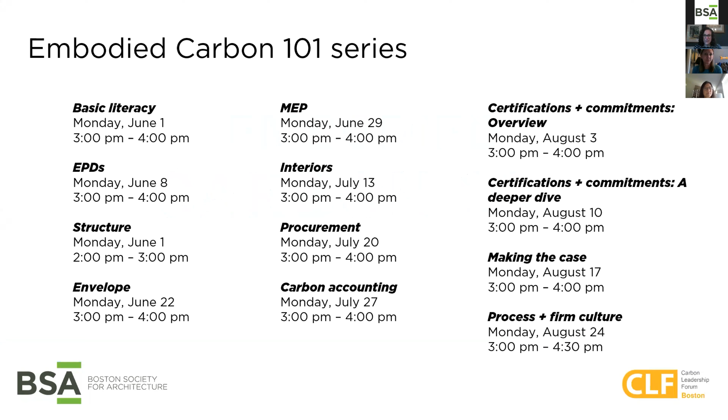I am Lori Ferriss, Director of Sustainability and Climate Action at Goody Clancy, a Boston architecture planning and preservation firm. I'm really excited to be here today kicking off the series and moderating our first session on basic literacy of embodied carbon. I'm really delighted to present this superstar panel of leaders in the embodied carbon world, beginning with Stephanie Carlisle, Principal at KieranTimberlake, an architecture planning and research firm in Philadelphia, Stacy Smedley, Director at SKANSKA USA in Seattle and currently Executive Director of Building Transparency, the nonprofit that launched EC3, and Frances Yang, Structures and Materials Sustainability Specialist at Arup, an international engineering firm.

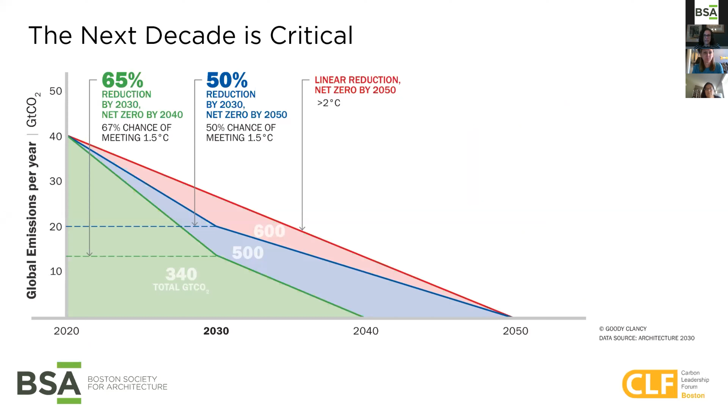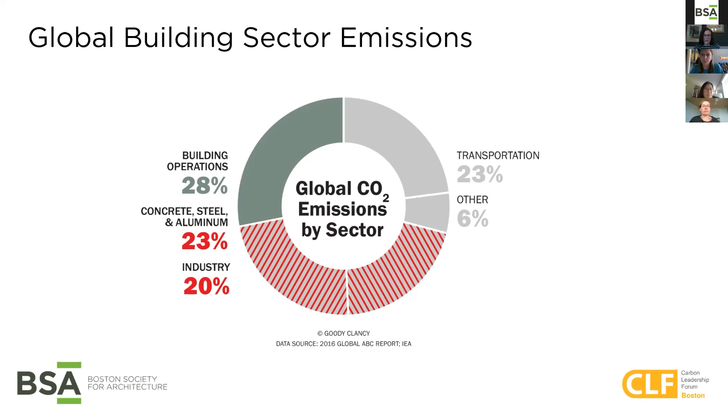So I think we as professionals in the design and construction industry need to take ownership of this pie and really think about how we can start to reduce our emissions. And as I said, the next 10 years are really critical.

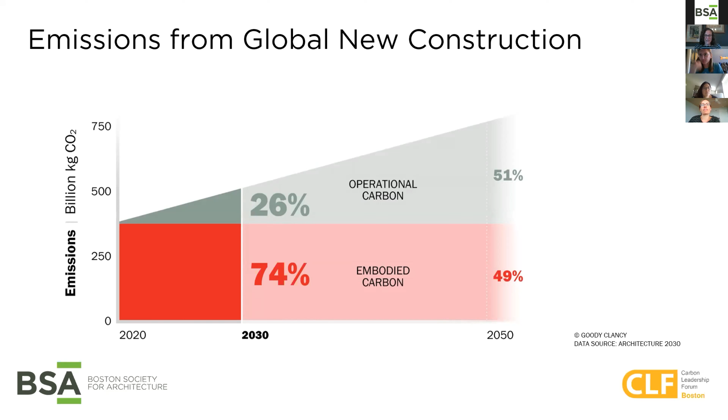When we look at new construction between now and the year 2030, embodied emissions will account for roughly 75%, two-thirds or three-quarters, of all emissions. And so it's really important that we address the full life cycle. We need to tackle embodied carbon emissions now if we want to have a chance of meeting those climate reduction goals.

We also know that we're building really rapidly. Between now and the year 2060, we're projected to double the square footage of our current building stock. And for context, that's approximately equal to adding a new New York City every month until the year 2060.

So I think this fact highlights, first off, that we need to better think about how we can reuse our existing buildings and think about opportunities to build less and increase our rate of renovation. And then we also need to rethink the way we build when we do need to add square footage.

Since this may be a little bit of a new concept to think about different types of emissions associated with buildings, I'm just going to quickly look at this graphically. Embodied emissions are the emissions associated with the building materials and construction. So at the beginning of a building's life, you have this spike in embodied emissions, from all the materials that are going into that building.

Embodied emissions stay relatively static over the building's use, with obviously some materials going into a building. And then every time you renovate a building, you have another little spike associated with all the materials and construction activities of the renovation. Operational carbon is, I think, what we're more used to talking about, which is there are emissions associated with using the building.

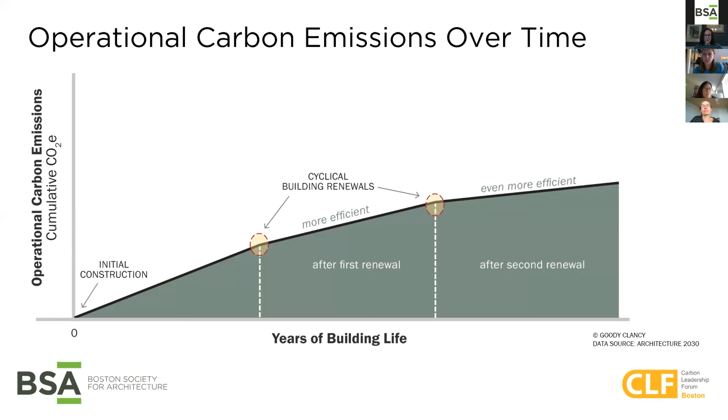So at year zero, there are no emissions. And then every year you use the building, you're emitting carbon associated with energy use in the building. And hopefully every time you renew the building or renovate it, that slope goes down as your building becomes more and more efficient. But what we really need to tackle are the life cycle emissions, the total emissions.

And these are what we need to get to net zero, and these are what we need to reduce over the next 10 years. And so we really need to be looking at and addressing both the operational emissions through efficiency and the embodied emissions, which is what we're here today to discuss.

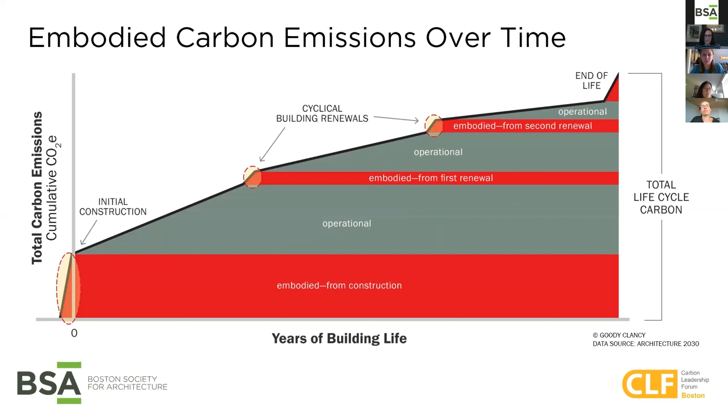So I just want to reiterate that we have a huge opportunity here to transform our best practices, the way we work with our supply chain, and the way we collaborate with each other to tackle embodied emissions. And I hope that today's session and the rest of the series will give you all vocabulary and tools that you need to make an impact now.

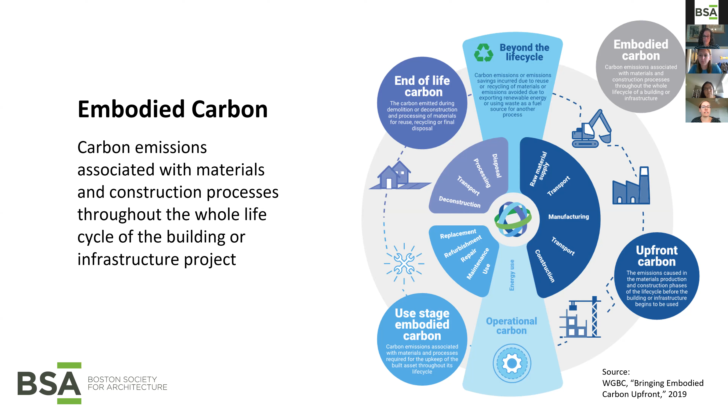So a really critical type of emissions for us to be looking at, particularly in connection to our 2030 goals and the aims to radically reduce climate change, which Lori was just speaking to. So I come back to this graph, which we've just seen one more time. It's a slightly different version.

It really hopefully pushes us to think a little bit more about these total emissions connected to a building project. So the building operations, which we really must radically reduce as quickly as possible and move towards net zero buildings. But these other slices of the pie, so to speak, that as architects we've sort of been ignoring or really underemphasizing for a long time.

And the reason I wanted to show this again is just to make the point that not just that our environmental burden or our guilt or our obligations have gotten larger and larger, but really encouraging architects to think about the fact that we touch many, many sectors. And we have a lot of power and agency outside of just the performance of a single building. So I hope that an emphasis on embodied carbon really helps us think broader about what architecture is and how we can help decarbonize the building sector, but also work on industry and all of these other sectors as well.

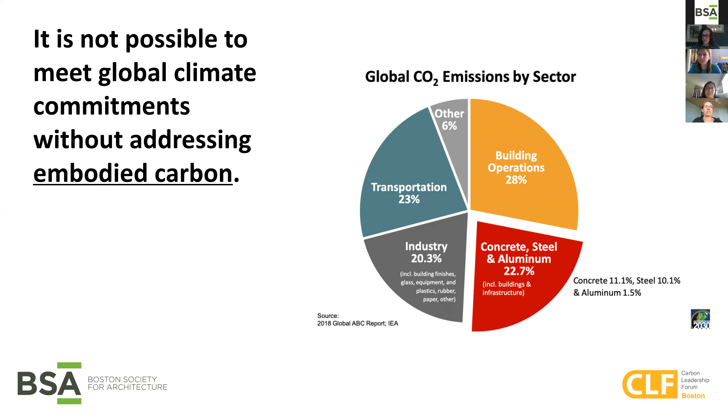So there's a fierce urgency for us to be talking about embodied carbon, a fierce urgency for us to be tackling it as soon as possible. And for that reason, we really need to be thinking about how we address embodied carbon, not just on the special projects, not on the one-off projects, not on our timber projects alone, but really how to spread this practice of life cycle assessment and thinking about carbon across our entire portfolios and our entire industry.

And so I really want to put out there this charge that we're all faced with right now of radically decarbonizing our entire industry, and the real amount of fierce collaboration that's going to require if we take that charge seriously. And so part of why it's so delightful to have architects, engineers, and contractors all on the same call together, all in the same presentations together, is that I think all of us feel this shared mission in which across the whole building industry, we all have a role to play. And we really need to think about how we can collaborate.

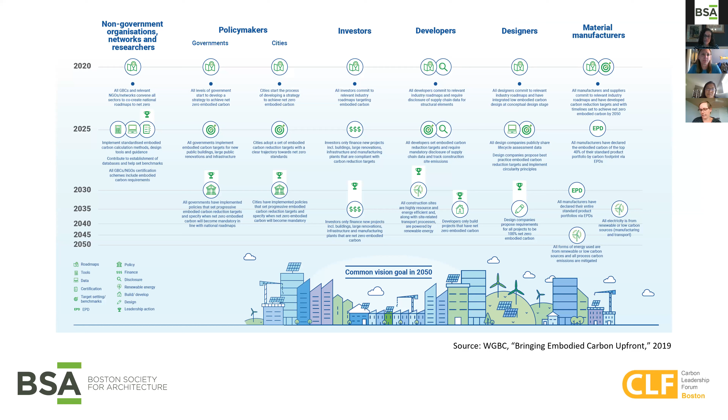So if we are aligned on this idea that we must tackle embodied carbon, how do we actually do that? The way that we actually assess and model is through a practice called life cycle assessment. Life cycle assessment is simply the evaluation of all the inputs and outputs and the potential environmental impacts of a product system through its entire life cycle.

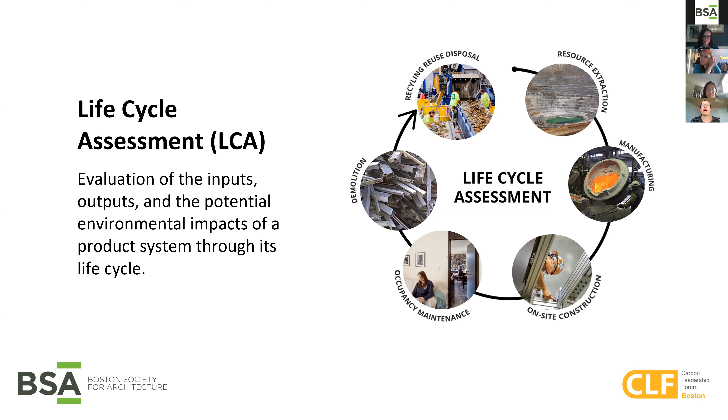This practice is new to the architecture profession and to our industry, but it's been around for almost 40 years, used from product design to manufacturing, etc., and is a really robust framework to help look at complex systems. So it's going to help us understand all those inputs and outputs, starting with resource extraction, land management, all the way through manufacturing, construction, use, demolition, or end of life.

Sometimes this is a helpful diagram to think about all those life cycle stages. And when we're running LCA models on projects, no matter what software we're using, those tools are really helping us think about all those material and energetic inputs going into those systems, and then all of the different emissions and outputs.

So whether we're running what's called a cradle-to-gate LCA, which is just going to look at that initial manufacturing or construction, or a full cradle-to-grave LCA, which is going to look at the entire product system, all the way to end of life, recycling, reclamation. These are all terms as architects we might not be totally in the weeds on with modeling, but we're all going to have to start getting a little bit more used to.

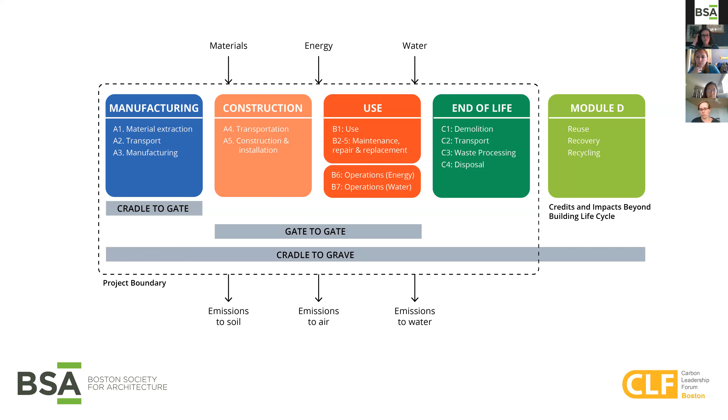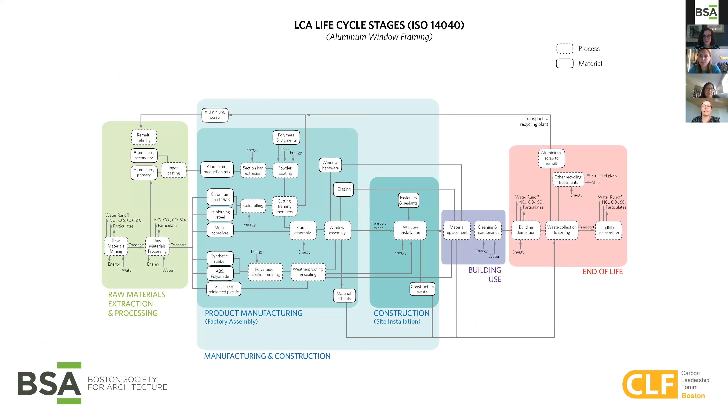And as we scale up and move from a single material to assemblies, one can imagine that that accounting becomes more and more complicated. Luckily, you're often not really going to be getting all the way into the details of all of these different assemblies, but making use of good LCA tools that help manage that complexity. Because once we really look at whole buildings, there's really two sides of this equation.

One is figuring out all the materials that are coming together. We often call that a bill of materials - this is one from a pretty small residential project - as well as all of the manufacturing and end of life side.

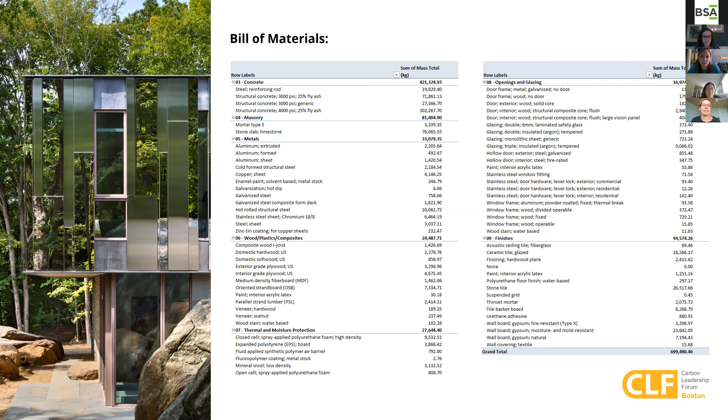What LCA models are really doing is taking all of that background data, the LCI or inventory data, and translating it into environmental impacts. Mostly on this call, we're talking about embodied carbon or global warming potential, but life cycle assessment also covers a whole range of other impact categories.

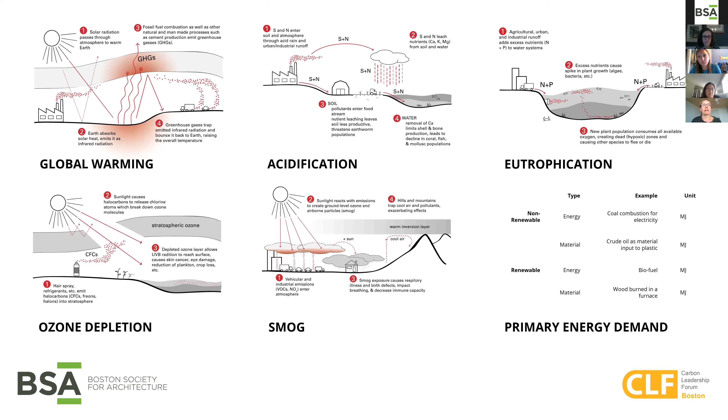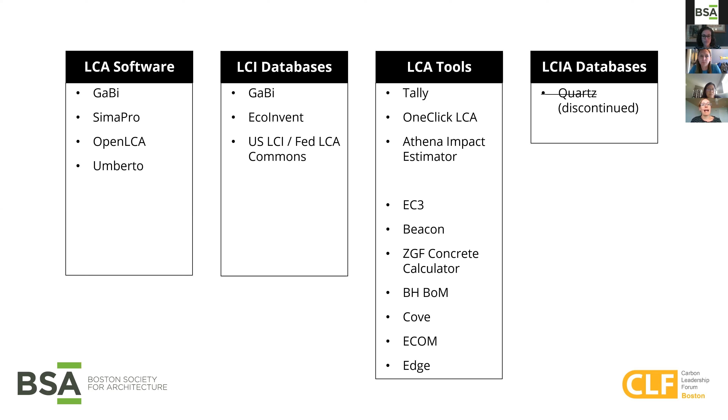I just want to mention, we won't go into this in detail, but there are a huge range of tools that can be used to do LCA. As a practitioner, you're probably mostly living in this third column - if you're running whole building analysis, you're probably using Tally, OneClick, or Athena. But there are also lots of other new tools and plugins coming online, from EC3, which helps you look at single materials and assemblies, through to Beacon, concrete calculators, and other tools helping to streamline this process. Those tools all draw on underlying software and databases that pull together the background data I was just showing about how materials are made and help us make comparisons.

What LCA is really asking us to do as designers and practitioners is hold in place two really different types of complexity. On one side, come to terms a lot more with how things are actually made and what the impacts are far beyond the building site. On the second side, what's really complicated is grappling with buildings as systems, where materials are coming in and flowing out - it's not really a single point in time. Modeling a building is actually a lot more complicated than a plastic cup or a cell phone or other simple products that have long been modeled in life cycle assessment.

So there are three main challenges that LCA really asks us to grapple with. The first is resolution. The tools help you translate between what we often do as architects, which is expressing design intent - thinking about a wall type, for example, how it's often graphically shown in construction documentation or in your BIM model - and translating that to the actual material quantities, which we need to run a proper LCA model.

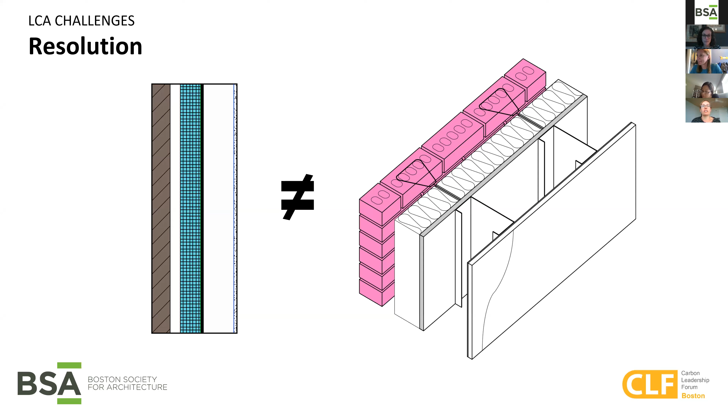The second thing it's doing, if you're running whole building LCA across all those stages, is thinking about time - how materials come in and out, and balancing trade-offs around topics like durability or maintenance. What's that initial push during construction, and then what are these other replacement and maintenance impacts, as well as end of life?

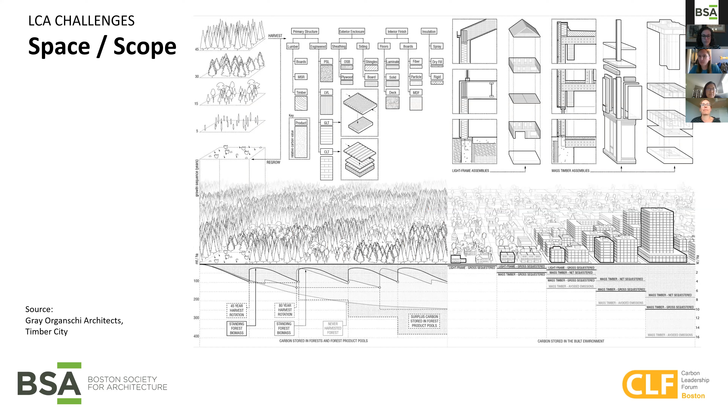So now I'll just go quickly through some of the basic types of LCA. I'm not going to go into detail on these case studies - I think the next segments in the carbon sequence, the next webinars, will get into detailed case studies - but I want to give everyone a sense, if this practice is new to you, of what this really looks like across an architectural project. I like to break it down in our practice into about 3 or 4 specific kinds of LCAs you might run across the course of a single project.

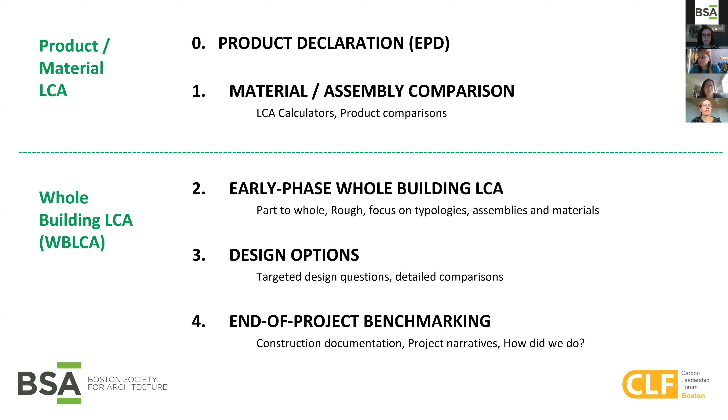The first are, you may be interacting with EPDs - environmental product declarations. Those are like mini LCAs that someone has already run, often about a single material. They're very helpful, and hopefully you can start getting more familiar with how these are published and what the data looks like.

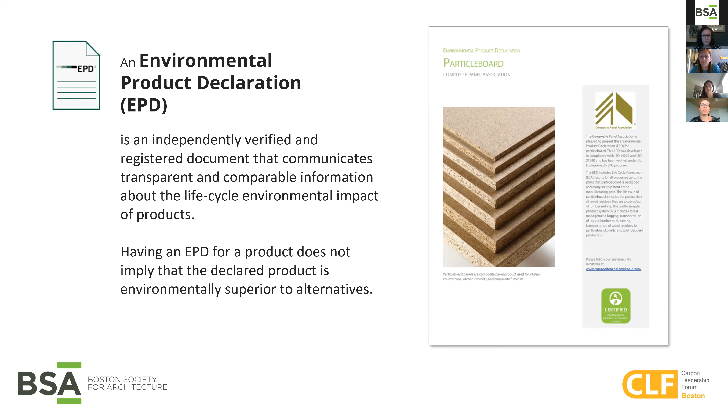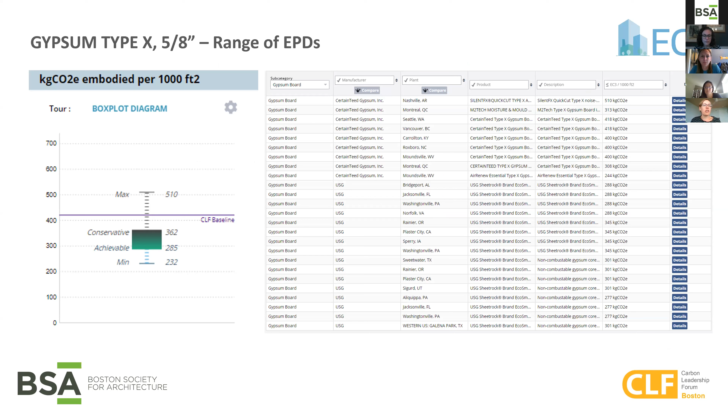Tools coming online like EC3, which I think Stacy's going to talk about in more depth, are helping designers find that data, get it together and compare it, and think about what an industry average number means and how to make improvements. So you can start working with that data, getting your feet into the water of LCA and thinking about simple product comparisons.

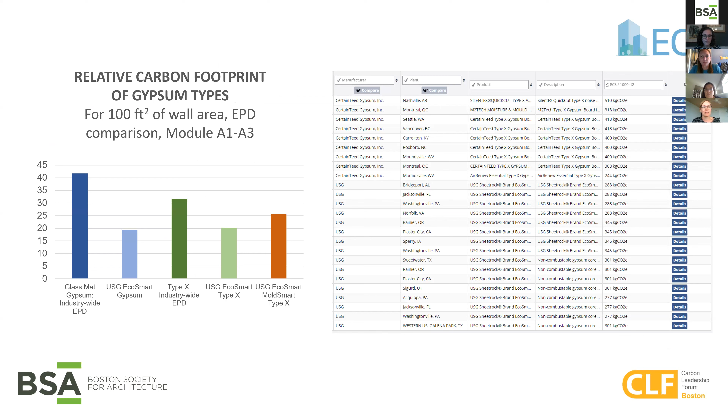Of course, when you're just looking at this last example, comparing different types of gypsum wallboard, comparing two products may seem really simple. But in many cases, the real challenge of LCA as a comparative practice is trying to figure out how to compare functionally similar things, and that's always a challenge for designers.

So in LCA we have this concept of the functional unit, which is about figuring out how to compare different assemblies, even different entire buildings. LCA gives a lot of guidance about how to set up functional equivalency, so we're really making comparisons that are meaningful to us.

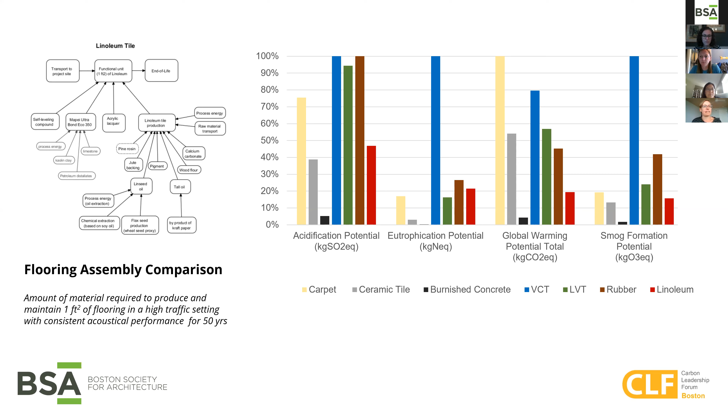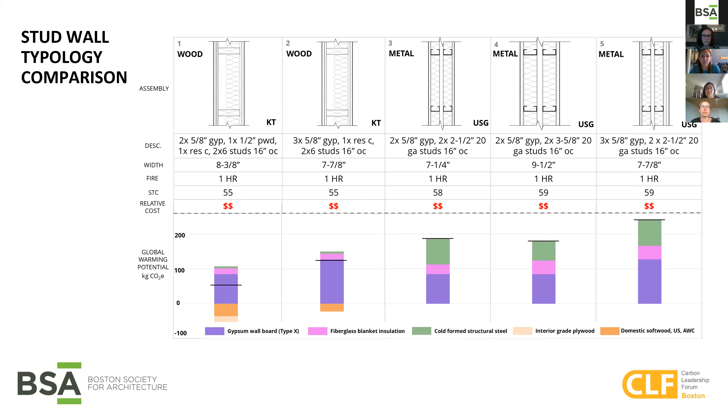Then when we move on to whole building LCA, I'll go through these pretty quickly, just giving a sense of what some of the tool output might look like if you haven't run an LCA before. We like to run these very early in a project, and really you're starting to get a sense of the part to whole—where do I spend my time, how do I focus my energy.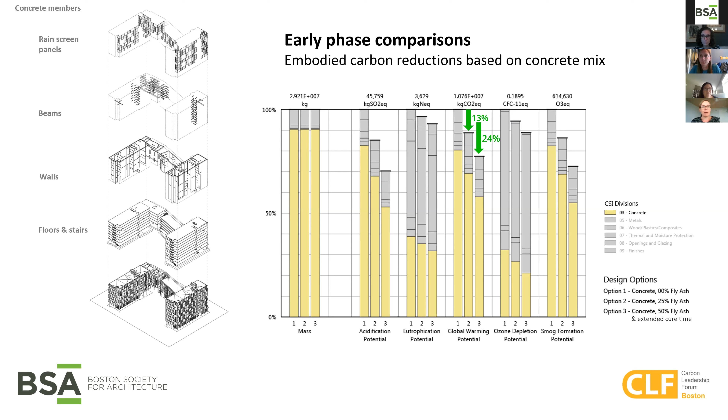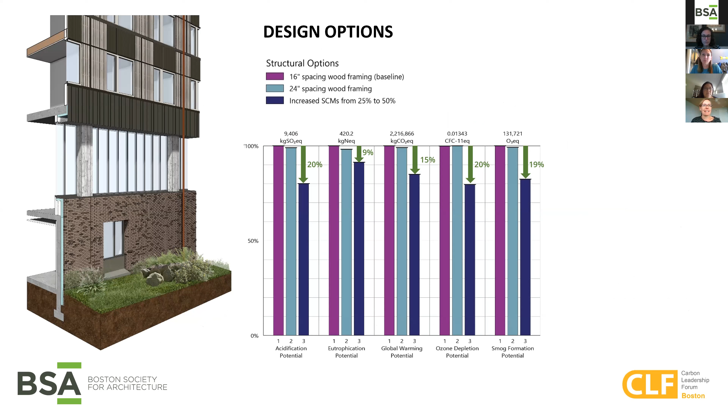Then often what we're doing is moving away from that whole building model and running design optioning. I find this to be super useful—it's where you can test out design decisions that could be made for a range of reasons, whether it's price, buildability, aesthetics, durability, etc. One of the real promises of LCA tools is that they can get this information on embodied carbon or environmental impact right in the hands of designers when making these other decisions, so it's not a separate analysis but really something we can use as part of the complex decision-making that designers are making on every project.

So this example is looking right at the ground floor of this building and testing out different assemblies natively within the Revit model, comparing a cast-in-place concrete option versus a brick layup system.

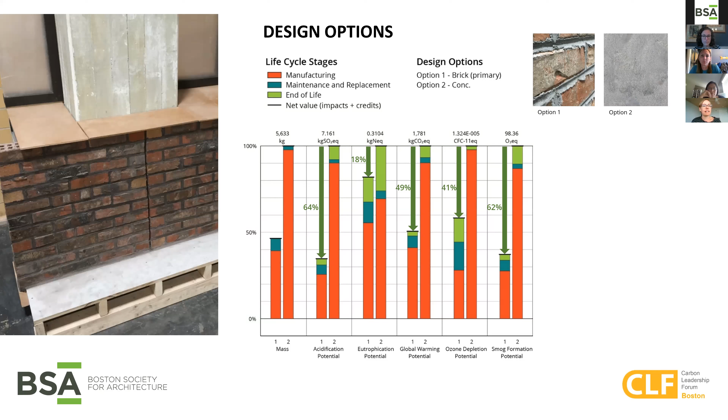So really, really helpful. In our office, we like to run these analyses at the same time that we're doing cost assessments, looking at energy performance, and often even making full-scale mock-ups. So really seeing embodied carbon as part of a holistic design strategy, not a separate exercise done on the side or after the fact.

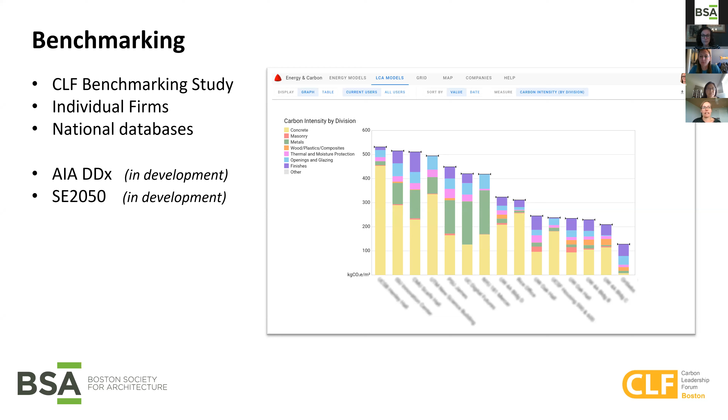And then finally, a lot of work is going on right now when we zoom out from the single project, just trying to understand what it even means to design a low carbon building. There's a lot of effort going into this question of benchmarking, as firms start to look across their whole portfolios, and as an industry, as we bring our data together through organizations like the Carbon Leadership Forum, the AIA's new DDX database, which is going to be incorporating embodied carbon, or other initiatives like the one from Structural Engineers 2050 initiative, both of which are in process right now and should really help firms understand how they're doing and help aggregate data across building assemblies and types.

I'm going to skip ahead and just end on these last two slides, making the point that really what we want to be doing is making as dramatic gains in embodied carbon as we possibly can across all of our projects. I think a lot of us that have jumped into the embodied carbon game are really still in the space of developing tools, developing vocabulary, finding out what the big win is. And I think we need to be doing that.

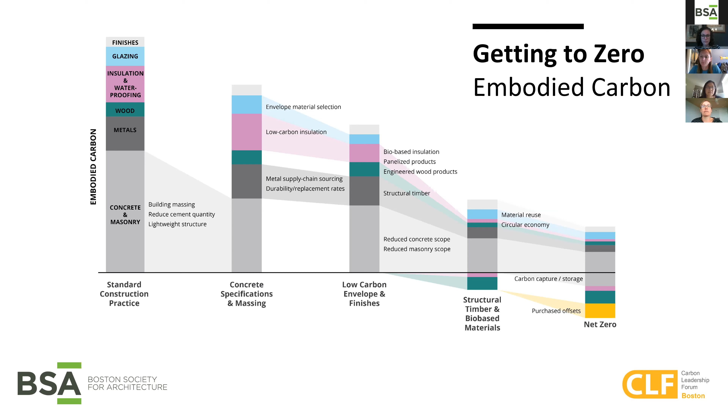So I just want to leave with these last proposals for all of you, something that maybe you can incorporate into a project you're working on now or any project. I think it's really important that teams start to set targets on their projects - we're not going to make any progress unless we actually have goals, not just to do LCAs, but hopefully setting some internal performance goals themselves.

Don't stop with the model. It's not meaningful if we only make carbon gains in our Revit models. We have to actually get it into construction - Stacy's going to speak to this. It's hugely important that we go across the product chain and really work with all of our partners to make sure these strategies are actually built and don't get cut from the project.

We need to think about how we talk to clients, but also maybe we just need to do this work, right? And I think that's a huge topic that will come up in other sessions in this series. Bring together carbon figures and analysis with design questions. I think that's really been key to success across lots and lots of practices - getting embodied carbon conversations right into design reviews, making it feel relevant to everyone on the team.

I would really encourage folks to not isolate embodied carbon and energy performance, but start thinking about a total carbon picture. It's the only way we're going to find strategies that are meaningful on all of our projects, because the trade-offs are there, right? So I think that's a really important topic. And finally, we all need to advocate for this topic, but we also need to share data - share strategies that are working and really all help each other across firms and practices.

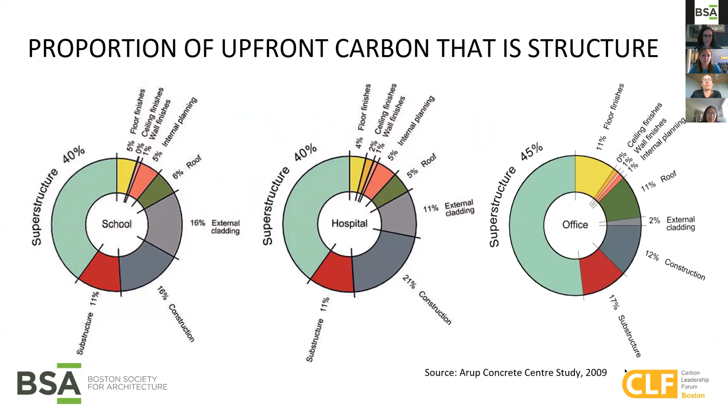Well, lifecycle assessments can actually help us answer this question. And here are some of the top 5 strategies that I think LCAs have taught us over the years. At the same time, I hope to use these examples to illustrate more about a lot of the LCA fundamentals and build upon what Stephanie's already introduced - to really help you understand some LCA principles that are important to keep in mind when doing LCAs.

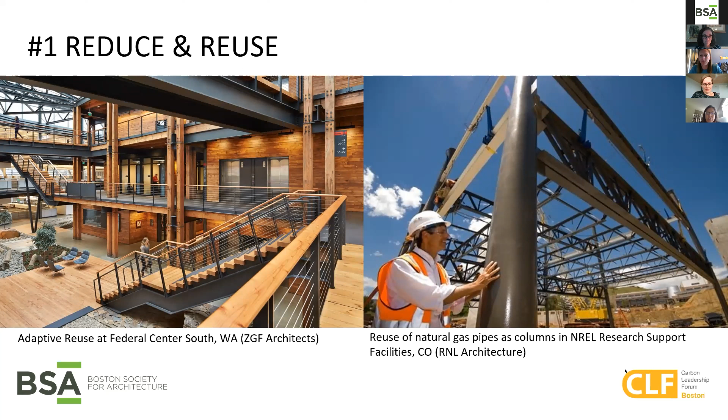Right, so the number one strategy, as you've heard already, is reduce and reuse. This includes reuse of existing buildings. It's also reducing the size of what we need to build new. And then when we can't do that, at least trying to salvage or use salvage building components.

The reason for this is because the manufacturing of materials like cement and steel are so energy intensive. There's also carbon dioxide released in the chemical reaction that occurs in making cement and also in virgin steel. So the production phase of the life cycle impacts is usually what dominates these materials. Once you see this, it's obvious why the more we can avoid those manufacturing processes, the more we can cut out the carbon emissions that occur in using these materials.

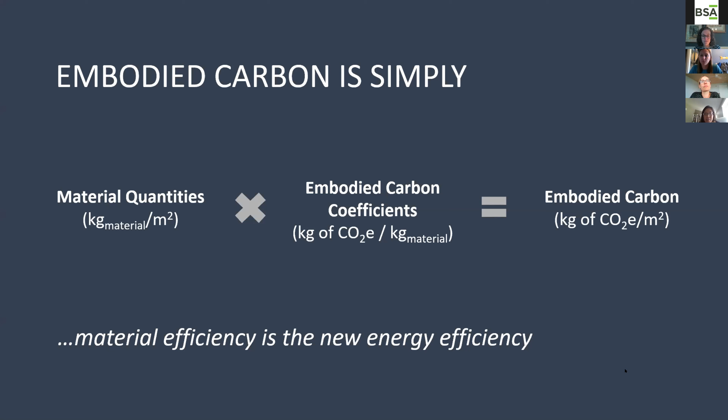The second strategy of material efficiency comes from the simple equation that Stephanie also introduced. Embodied carbon is basically material quantities times embodied carbon coefficients. So while we talk a lot about what contributes to the embodied carbon coefficients over the life cycle of the materials, equally part of this equation is the material quantities. I like to think that material quantities are to embodied carbon the way energy use intensity has been to operational carbon. So in essence, material efficiency is the new energy efficiency.

What's great about this strategy is that structural engineers already strive for material efficiency all the time. It's just part of their job. Computational optimization has helped us get better and better at it as well. So on the new international airport in Mexico City, these kinds of advancements helped us reduce the weight of the roof down further than in any of our past airport projects.

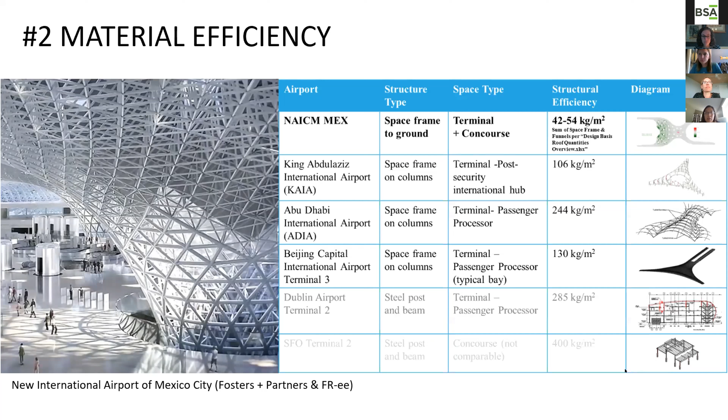But equally critical was what you don't see: a close collaboration with Fosters and FR-ee, and an approach to design that allowed the geometry of the structure to follow the optimization. We don't need fancy algorithms necessarily to make structures more efficient. There are actually a lot of other systems and ideas that I think are just underutilized. We don't use them enough, really, often because of cost, unfamiliarity, or other challenges at the moment. But I think we're going to need to turn to those techniques more and quickly if we're going to have any hope of driving down embodied carbon as soon as we need to.

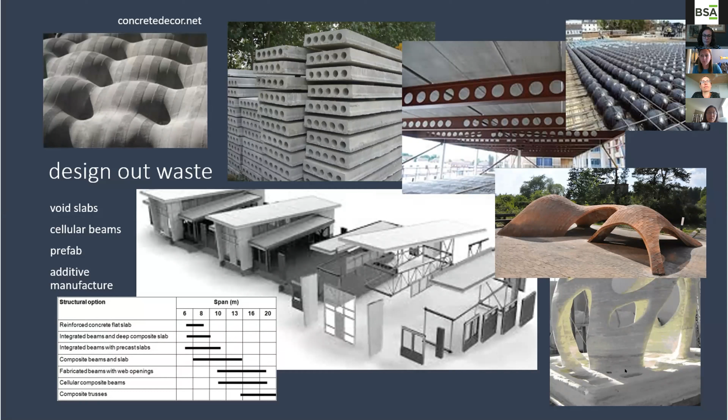So the third strategy would be reducing cement. You've seen again where Stephanie showed that example where the impacts from concrete were really enormous. This occurs in steel structures, timber structures, and it's because in steel systems we still use concrete in the floors. And for all structures, you're nearly always using concrete in the foundation. So just as we don't normally need as much material as we put in our structures, we don't need as much cement as we're commonly putting in concrete.

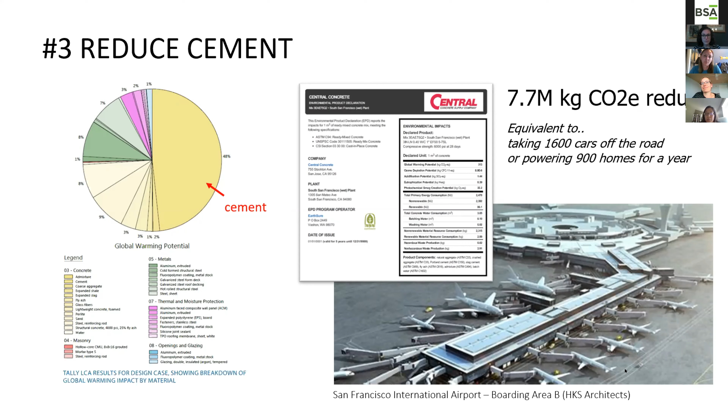On the SFO airport, we were able to use environmental product declarations, as you see from Central here. These are EPDs, and we could carefully tailor the concrete mixes and limit the GWP based on looking at a lot of EPDs, and really just talking with suppliers early, talking with contractors early, and end up with significant reductions in the embodied carbon.

Now this also brings up another tenet of life cycle assessment called sensitivity analysis. We want to keep in mind that there can be significant variability that isn't always illustrated by the LCA tools that use a single embodied carbon factor, when there can actually be a range for that material.

So for instance, here we were comparing a variety of concrete and structural floor systems. While you might see a particular system that appears to have the highest embodied carbon overall, if we specify the concrete to be very low impact, it could end up lower than if we chose a system that appeared to be lowest but we didn't pay any attention to the specification of concrete, which could end up being higher than the one that initially appeared highest. I hope that makes sense.

So in any case, being aware of the sensitivity of the results to other factors and then testing them can help us see more clearly which of our design decisions are most critical.

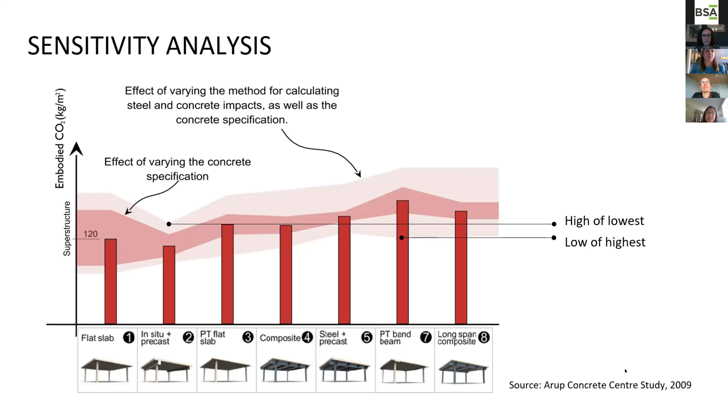Okay, number 4, I alluded to timber, but it's really about using carbon storing materials instead of highly carbon emitting materials. In this case, it would be using a timber structure instead of a concrete structure.

Now making comparisons with wood gets complicated really fast. So there are 3 more LCA fundamentals I'd like to remind us about.

The first is that we should make sure to understand which life cycle phases are included. You might wonder why sometimes with wood you see positive carbon factors and sometimes negative. It's often because there are different methods for deriving those carbon factors, and they don't start and stop at the same place over the life cycle. Here you see 7 different methodologies that are not aligned, so in the end they land on different carbon factors for wood.

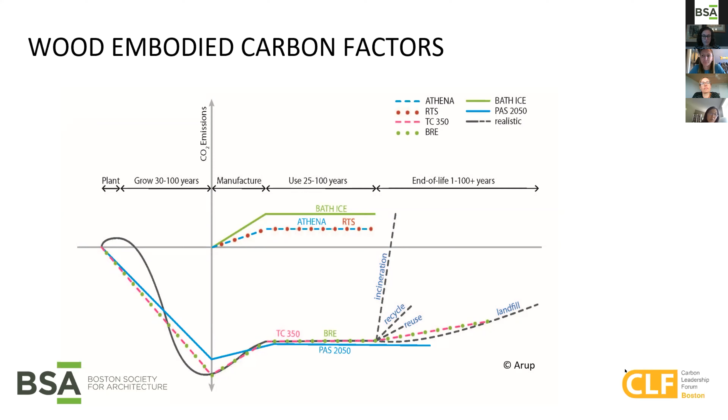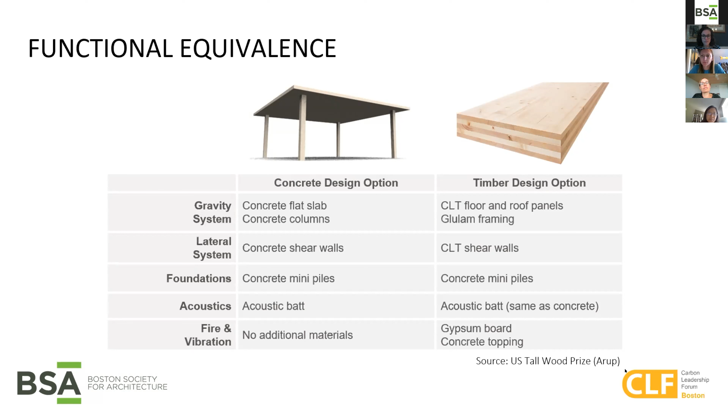The second important fundamental is functional equivalence, and Stephanie mentioned this as well. Here's an example where it's really important to keep in mind that we have to do apples to apples comparisons. Sometimes we see studies that only show the structural portion of a timber system compared to concrete, but that leaves out all of the materials often needed to make the wood system provide all the function that a concrete system would offer inherently. So for a fair comparison, we need to ensure functional equivalence by adding in the materials that provide especially the same fire and vibration performance as the concrete system. It's important to include those extra materials in the comparison.

Lastly with wood, it's really important to remember that with an LCA, we're looking at a limited system boundary, either with EPDs that are usually cradle to gate, or even with LCA tools that expand that a little more. There aren't currently LCA tools that account for how our procurement choices could influence what happens in the forest. And the carbon in the forest is magnitudes larger than what's sequestered or stored or coming out of the processes in making wood products.

So we have to realize that we might need to turn to other tools too. Forest certifications and carbon offset programs are some examples that are needed to fully inform our decisions around wood, because LCAs don't always tell us everything, even around carbon.

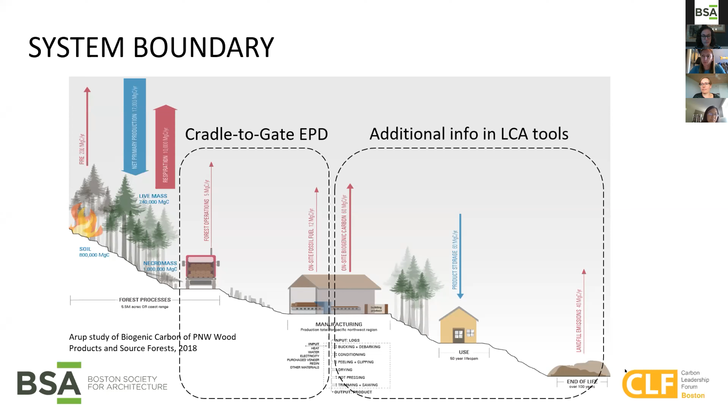And then the last of the 5 is design for deconstruction. So thinking ahead about how we could change this term cradle to grave that's used in LCA, how could we change that to cradle to cradle? How could we build now so that in the future we can use those materials for new buildings? It's basically going back to strategy number 1 of using reuse or salvage.

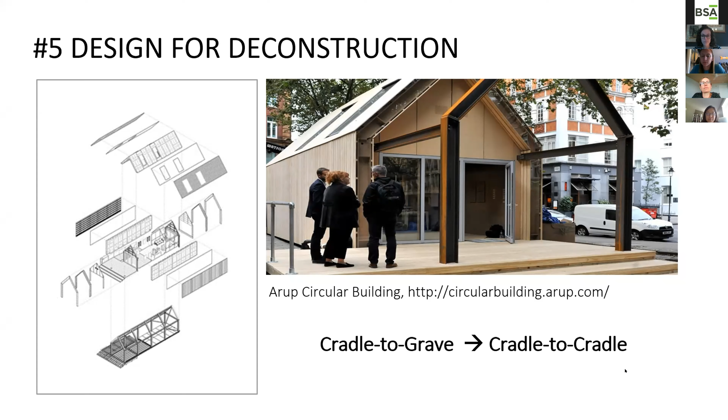Okay, so now I want to talk a little bit about baselines versus benchmarks. These are commonly used to quantify how are we doing. Are we doing better, and by how much?

Now with baselines, and I think this will be covered a bit in the certifications and rating systems course later, but they're usually in those programs because we need to demonstrate some kind of savings when comparing your building to some kind of baseline. But the baseline is often a fictitious design that is a better representation of business as usual, or what would result if there were no interventions. There are a few standards and guides out there to help us define this baseline, but in truth, we don't quite have the equivalent of an ASHRAE 90.1 Appendix G that we have for operational energy baselines. That's something we're going to need to work on as an industry, towards a better standard for defining the baseline for these comparisons.

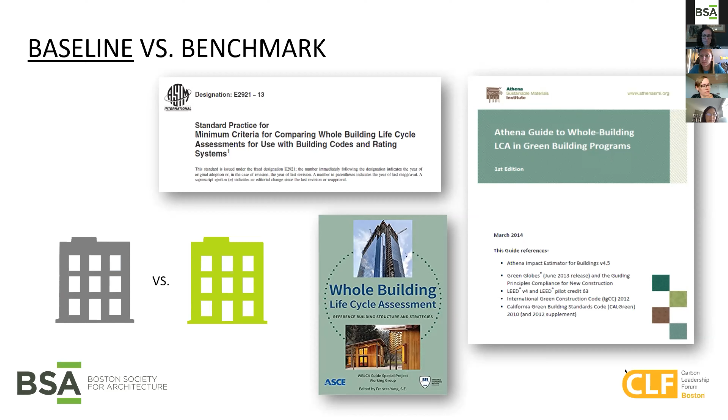Now benchmarks, I think of as a little different. This is where we're looking to see how our design compares to other real projects that are similar, and they're often used for setting targets.

And for policy even. Now the Carbon Leadership Forum did a benchmarking study in 2015, and it's probably one of the best sources for benchmarks right now. But if you look more closely at the data, you'll see that there are actually a lot of big gaps in the information that was available. And if you look even closer, there was a lot of inconsistency in what building components were included and the source of the embodied carbon factors used from different data sets.

So basically, we need more data from projects, and collected in a way that's more consistent, giving us the granularity we need to set better benchmarks and targets, especially on our way to getting to zero. And what's exciting to me is that this is one of the undertakings under SE 2050.

Last September, the Carbon Leadership Forum issued a challenge called the SE 2050 Challenge, and we're now working on a commitment program modeled a lot after AIA 2030. One of the primary aims is to engage structural engineers to report embodied carbon of their designs to a common database, so we can establish benchmarks and targets more quickly and get everyone on the same path to zero. It's meant to be a resource to inspire and equip structural engineers. If you know structural engineers, or you are one, check out our website at se2050.org and join us.

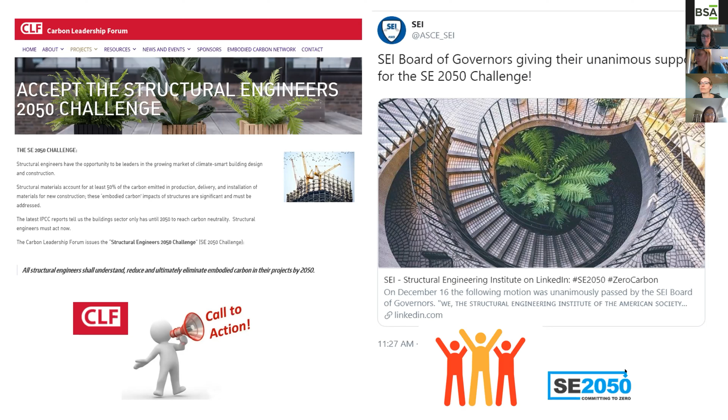Even if you're not a structural engineer, I hope you'll keep these five strategies in mind and remember these LCA fundamentals, because I think they're really important to get the most out of LCA and do the most in reducing embodied carbon. So now I'll turn it over to Stacy, who will talk about embodied carbon in construction.

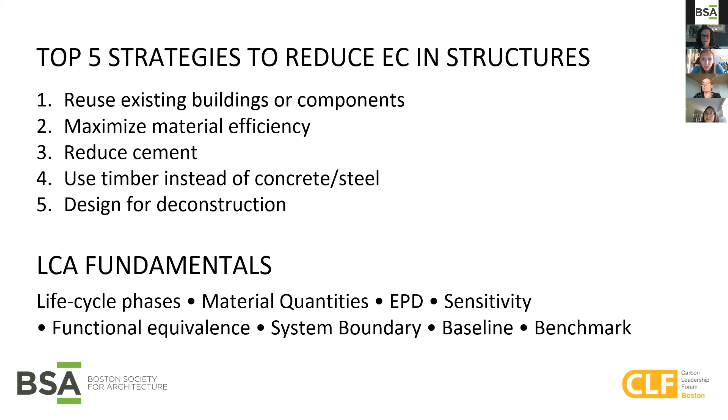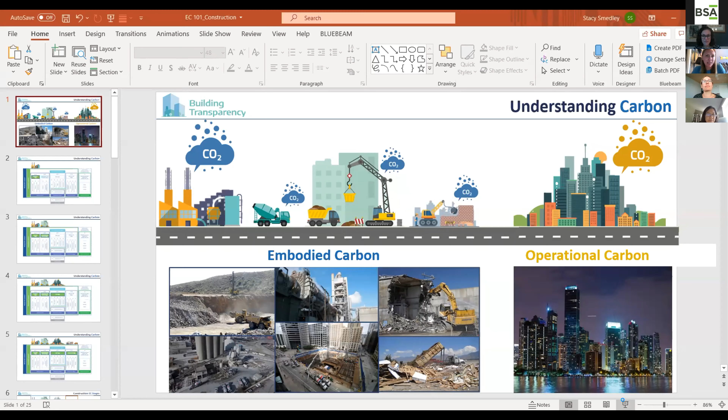My name's Stacy. I'm a sustainability director at Skanska USA, a large global contractor. I'm also the current executive director of Building Transparency, a new nonprofit focused on providing tools such as EC3 that are open access, to help actively reduce embodied carbon today.

What I'm here to talk about today is how contractors in the construction industry can look at embodied carbon, and why we think we have a role in addressing this as an industry.

This is a slide I typically use when talking to contractors, showing operational versus embodied carbon. Operational carbon is what happens once we've turned over buildings to their owners, and the lights turn on, systems start to work, and energy starts to get consumed. Embodied carbon is everything before that - all the things contractors are actively engaged with, whether it's how we extract and procure materials, how we transfer them to construction sites, and how we install them. It's a tangible thing from a contractor perspective, because it's the stuff we work with - the building materials.

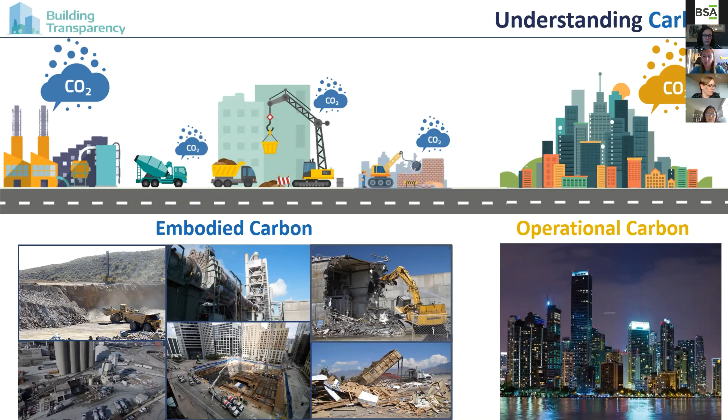I believe contractors have a very large role to play in this, and we need to approach it as an industry in terms of how we address this.

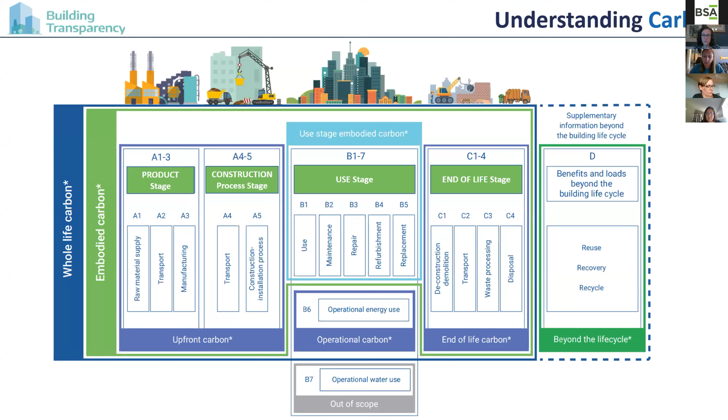Looking at it from a construction perspective, it's really stage A and stage C where we as contractors have the most impact. Within those stages, these are just some pluses or minuses, because this can change based on what reports, but based on data we've developed at Skanska on our projects, you can see that stage A is a large portion of the overall embodied carbon footprint.

And then the end of life stage also has a component to play. Within stage A, you're looking at the product stage, which is really that manufacturing stage versus the construction process stage. The manufacturing stage is where the most emissions kind of play out. So if we're going to start somewhere, really looking at how we are procuring products and where from, and are they the lowest carbon options, is how we've approached this so far.

One thing we also tend to think about from a SKANSKA perspective, but just for construction in general, is really moving that end of life stage up front. When we are building a building, typically we are demolishing a building first, or clearing a site. So we really need to think about how we are taking those materials down, how we are recycling them into new products when possible, how we are not just looking at waste diversion from a percentage reduction, but also from a carbon perspective. Thinking about that on the project you're deconstructing now, in addition to the project that might be deconstructed in 50 years.

So at the end of life stage to start, there are some typical things that are good lessons learned and really kind of rails to guide you. Setting project goals around construction waste during pre-construction, quantifying those opportunities for deconstruction before putting together your bid documents, working with companies that would come in and actually tell you what it would take to take out the gypsum board or deconstruct the structure of a building.

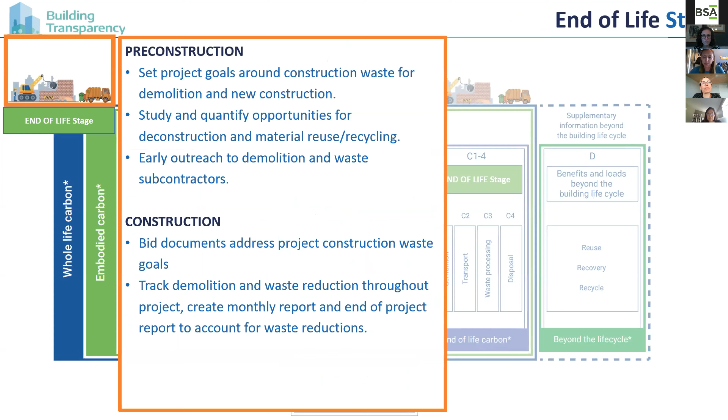And then getting into construction, it's really looking at the bid documents to make sure you're addressing project waste. We're also tracking it actionably and looking at not just percentage reductions, but the carbon emissions associated. Here's an example of a report SKANSKA puts together for waste, where it's not just looking at tons reduced, but also gallons of water consumed for things like demolition, or carbon emissions. So again, building carbon into how we actually track and report these things, even at the end of life stage when we're demolishing buildings.

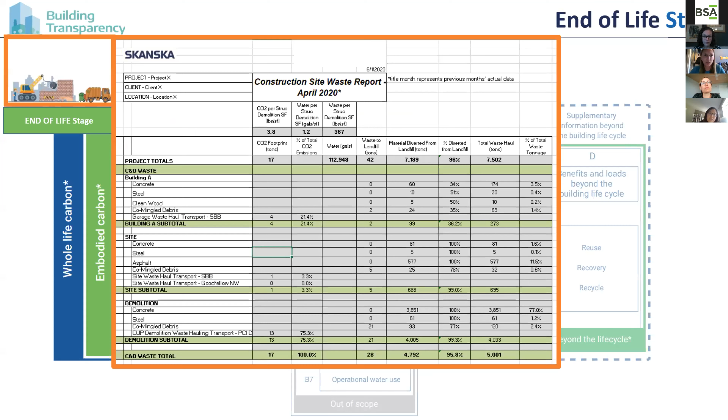The next is really that key stage in our minds, that A1 to A3 stage, where we're looking at the large crux of embodied carbon of what we're procuring and putting into place.

Again, there are lessons learned about making sure we're looking at carbon and cost in pre-construction, that we're looking at project specs from our design teams, seeing if it's addressing environmental product declarations and goals, and then actually starting to engage our suppliers during pre-construction. If we know carbon is something we're going to track on a project, if we're building that into our procurement documents, getting ahead of that with suppliers, letting them know it's coming, that they should invest in EPDs, then they should also know it's going to be part of the bidding criteria.

During construction, again, it's building it into the bid documents, so we're addressing embodied carbon and EPD requirements in bid language. We're putting it into our leveling sheets, so we're looking at EPD generation and carbon quantities next to cost when we're looking at our bids. And then tracking the materials we procure and actually assuring that we are achieving the savings we've set for ourselves during whole building LCA and our specifications during design.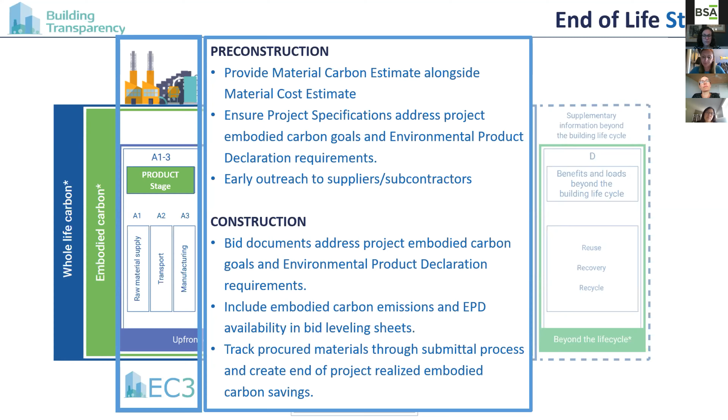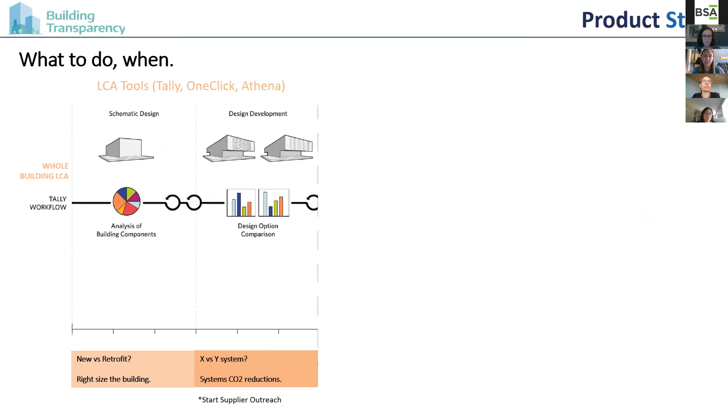So when we started looking at this for the construction industry, looking at the LCA tools out there that were doing a lot of that early work about right-sizing your building and looking at systems versus each other just to reduce embodied carbon, what we couldn't find was that next stage where, as a contractor, we would want to have language and specs that said, okay, you're using carpet, let's make sure we are specifying a carpet that has an EPD and also has a certain kilogram of CO2 value as a basis of design. So then we can actually bid on those documents and actually procure and track the data.

And really both of these things need to happen, this early LCA assessment plus this specification and procurement assessment, to really reduce embodied carbon and have it be realized.

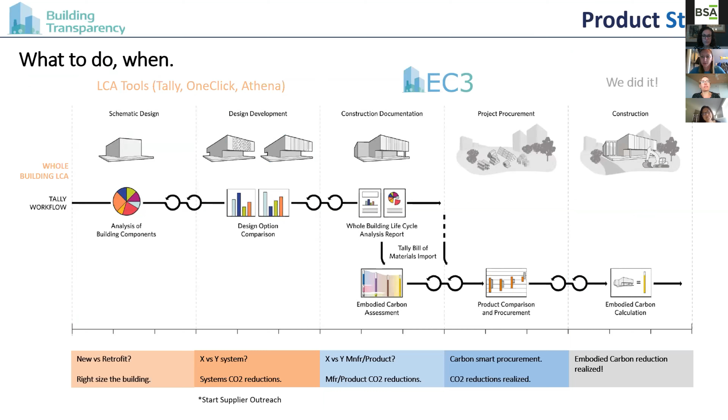EC3 has been the tool that's been developed, starting at incubation at the Carbon Leadership Forum and now housed at buildingtransparency.org. That's a free open source tool trying to be a resource for the industry when it comes to accessing EPDs, understanding who has them and who doesn't, and starting to set baselines, benchmarks, and reductions depending on how you search and sort the data. I encourage everyone to go register and log in and get your free access. There's no cost to join to be able to do the next things I'm going to show you.

You saw a version of this with Francis's presentation too, but really this embodied carbon accounting is similar to cost estimating. So we call what we do on the construction side an embodied carbon estimate, where we take kilograms of CO2 as our units multiplied by material quantities that contractors generally have for estimates, and get to an embodied carbon estimate for the project alongside a cost estimate.

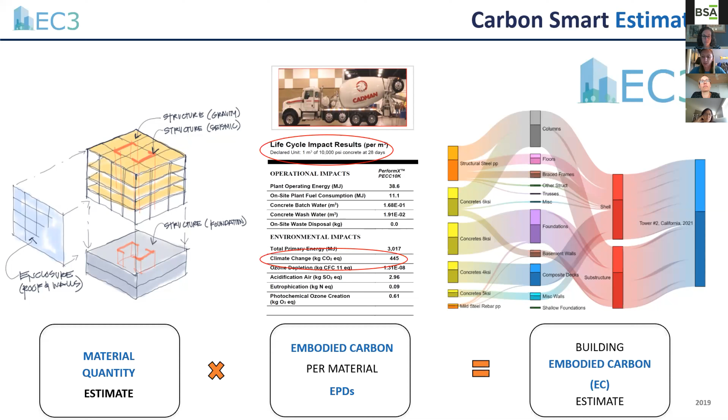Again, EPDs are the source of that data where you can get to that unit per product. That's really the step once you've made those whole building LCA assessments, where you want to actually look at the products you're procuring to get that actual realized savings.

We use this nutrition label comparison to say it's got a serving size, which is the declared unit, and a carbohydrate, which is the kilograms of CO2. Those are really the data points that we need to do these assessments at the product level.

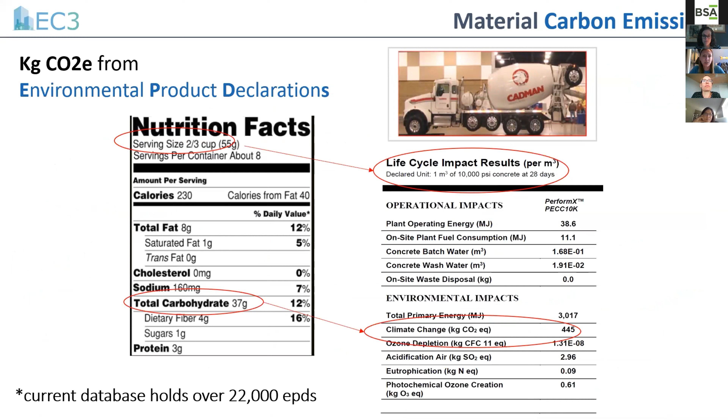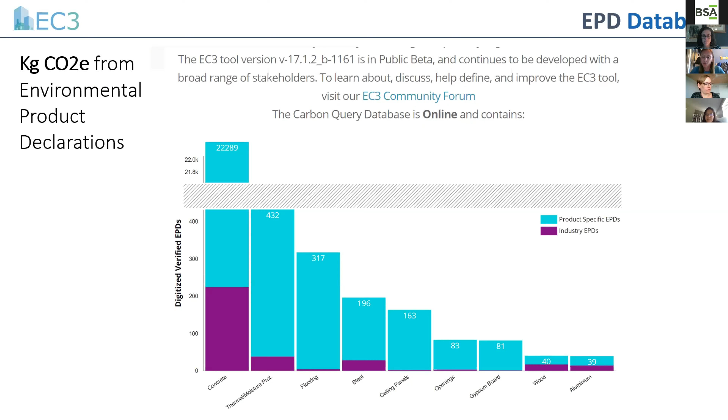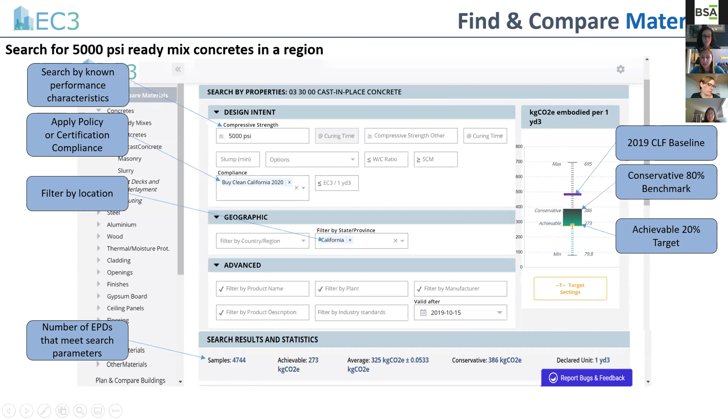So EC3 has a database of over 22,000 EPDs. It starts with certain categories. What it allows you to do is actually see digital versions of these EPDs and begin to do things like search based on what you know. If you know you have a project in California that has a 5,000 PSI concrete mix and it's going to meet Buy Clean California, you can start to search the system for things that are compliant. It will produce a sampling of all the EPDs that match your search. Then you can start to dig into the data and do the multiplications to get a project level estimate of that supply chain data.

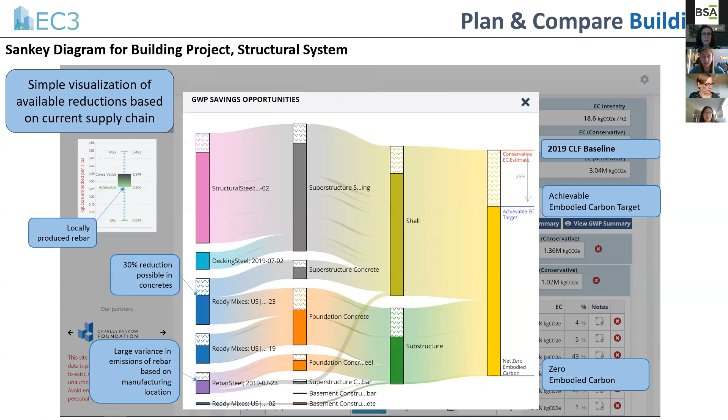So it's giving you data to start to see where savings actually exist. This is kind of low-hanging fruit in our minds, where it's just really being smart about how you specify based on carbon. The other thing it can do is really start to help set these baselines, benchmarks, and limits - and the words that Francis said, very rightly so, we're still trying to figure out.

And then what SKANSKA started to do - and we actually now, on the building transparency site, have resources available on the resources tab where you can download some of this language that's been templated - you can actually build this language into your specifications and bid documents.

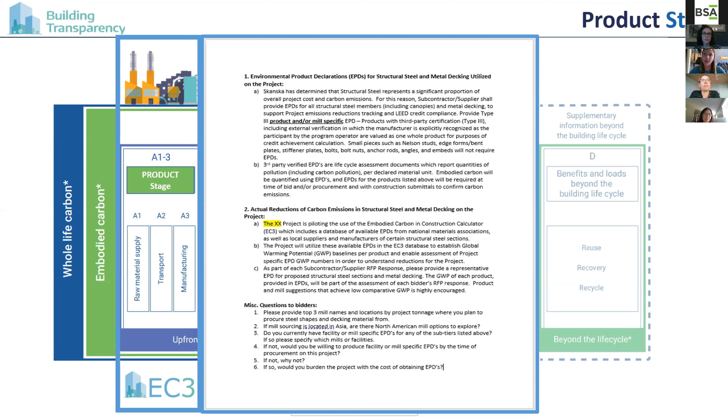This is an example of a bid template where we are talking about requirements for EPDs, that we are going to look at targets and reductions, and then questions like: if you don't have EPDs, will you get them? If not, why not? And if so, will you burden the project with the cost? So really questions to drive the market - we need these things in specs and procurement language to actually start to have the market signal be sent to manufacturers to disclose, declare, and then reduce.

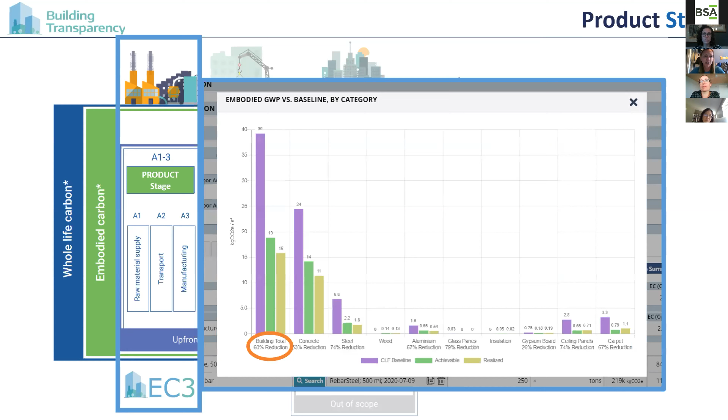And the last thing is, at end of the day, where you want to actually see your realized savings is if you actually select EPDs. Contractors are used to tracking submittals for things like EPD credits and LEED or recycled content in the older version. So it's just another thing that we can actually track - get all the EPDs into a database and actually see the realized savings for a project, and know that we actually did achieve that savings.

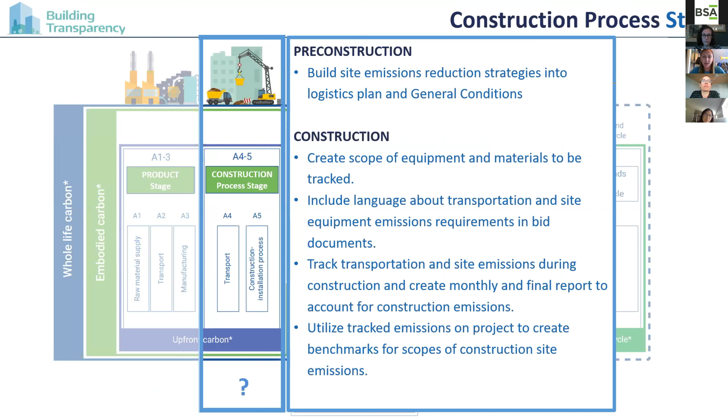I'm going to just talk briefly about the fact that we do track the construction stage. This is that 5%, and there's a lot of work, and there's not really a standard for this in the construction industry right now. Here's an example of how SKANSKA has set up a template to do this, where we look at all the different things. It's a whole bunch of data, and this is like the Wild West of embodied carbon. If where we are now is better than where we were 2 years ago, this is still an aspect of it that is very much in a template understanding stage, but we need to do better on this, and we're starting to figure out ways to track that actionably on our job sites.

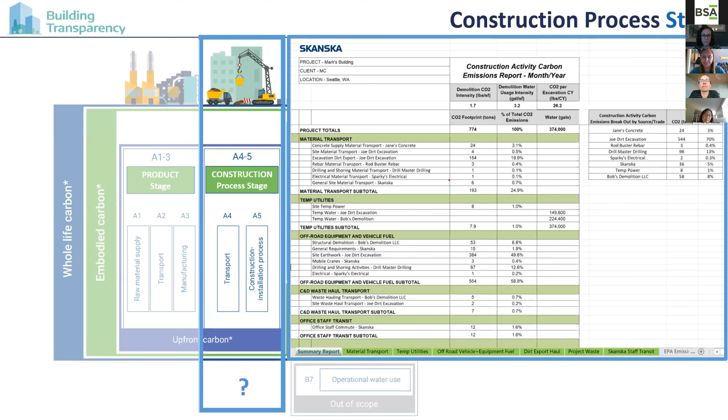With that, I'd like to stop. I think I left us 4 minutes.

All right, thanks, Stacy. So I think we have a few minutes for questions. Let's start off with one about the ratio of operational to embodied carbon. Going back to the global emissions pie chart, it's about 28% operational and 11% embodied. The question is, what does that ratio look like at an individual building level? Obviously, this varies due to many factors, building by building.

I don't know, Steph, do you want to, based on your many LCA studies, answer how this manifests in a single building? Sure. Well, I will answer as usual by saying it depends, and it's complicated, which is a bad answer. But the two things that are really interesting, to toss out a new concept, is that when we're looking at those ratios, they obviously change quite a lot depending on the amount of time we're interested in. So if you look at the percentage allocated to embodied carbon for a really poorly performing building over 100 years, it's going to look like embodied carbon is tiny and fractional.